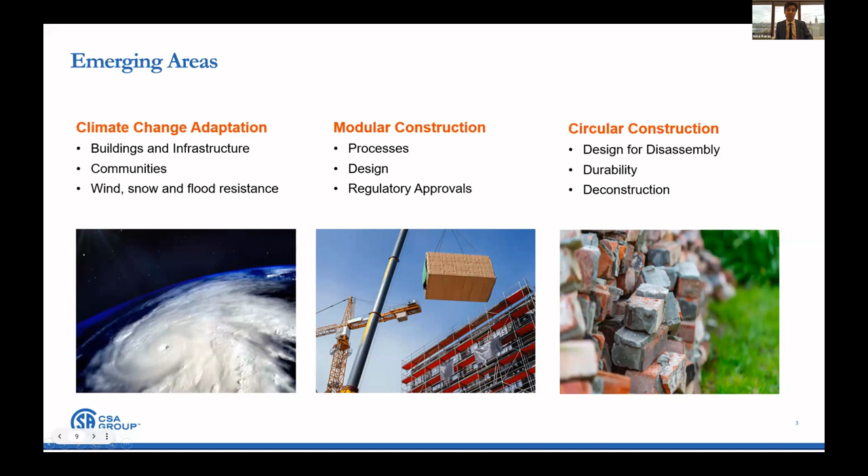On circularity specifically, we have been working on circularity for the built environment for many years, but until recently, concepts such as design for disassembly and our guide on that, adaptability and deconstruction were unheard of. So we waited patiently as we knew these concepts were real, important, and would also serve society well. We just needed a catalyst. That is why we are very thankful to CELC, with whom we've partnered on a number of initiatives, including on funding 2 of the research studies that directly supported the development of CELC's guide for the commercial real estate sector.

We are thankful not only to Helen Goodland of Scius Advisory and Ryan Zizzo of Mantle Developments, who are the leaders on our research team and were in charge of these 2 studies and reports, but also we are thankful to all of you present today for insight and input to shape these studies.

As we will momentarily hear from Helen and Ryan, these reports provide a breadth of guidance and best practices on extending the lives of existing office buildings by looking at things such as design interventions for optimizing existing buildings, ways to minimize waste, reuse of salvaged construction materials, and also the role of embodied carbon and life cycle assessments.

So today we will hear that conditions are ripe for extending the lives of existing office building stock through upgrades, renovations, conversions, and other creative forms of adaptive reuse, and a combination of private sector financing, public policy, standards, and industry could help implement and scale circular strategies. At CSA Group, we are thrilled to continue helping in facilitating the uptake of circular economy strategies for the real estate sector and more widely for the built environment as a whole.

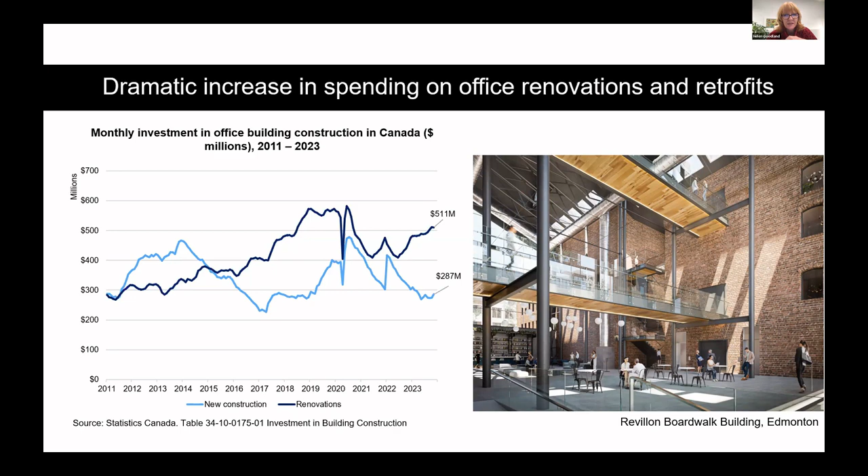Next. There's other business cases for circularity. I think we're going to get into more of these shortly, but everything from reducing operating costs, engaging customers and employees, attracting new tenants, I think is going to be an incredibly important one, and we'll hear from others on that. But there's also opportunities to spur innovation. The building industry is very large and has a great role to play in Canada's innovation and competitive stance across a number of sectors. Next.

The way we've organized our report is around the 4 key areas, really following the life cycle of the building process. So there is a number of circular design strategies that are discussed, and within each we are providing examples from Canada and around the world. So everything from upgrades and renewals, tenant fit outs, versatile design, and so forth. And then we get into circularity in the field. We're looking at how construction processes and tenant improvement processes can adopt circular practices.

We look at the end of life and then back into new life of products and materials, circular input strategies, secondary material markets, and so forth. And then I think the most important piece of all of this is, well, where do we start? So in the top left-hand corner is looking at what are the underutilized circular strategies that we're starting to do today, and what can we really leverage to get moving in this area first.

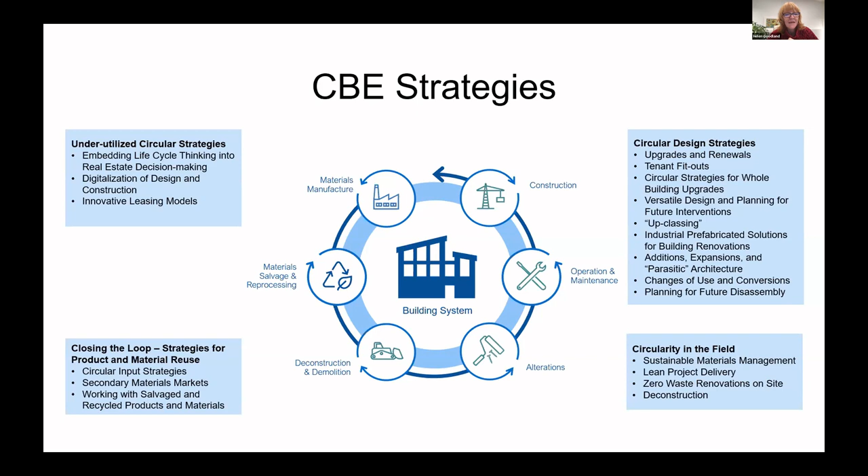So those are life cycle thinking, which of course Ryan is going to be talking about, digitization of the design and construction processes, gathering data, finding out more about what we're really doing, and then finally innovative leasing models. And we're seeing quite a lot of really amazing and creative solutions to making leasing more attractive to the market. Next. So a couple of examples.

Next one is, there's a lot of talk in Alberta right now for Calgary and Edmonton in converting offices into residential buildings.

Next. In the US, we're seeing this in Canada too, there's a great example of adding a mass timber structure on top of an existing concrete building to save on foundation additions. If they had just added concrete or steel, they'd have had to upgrade foundations.

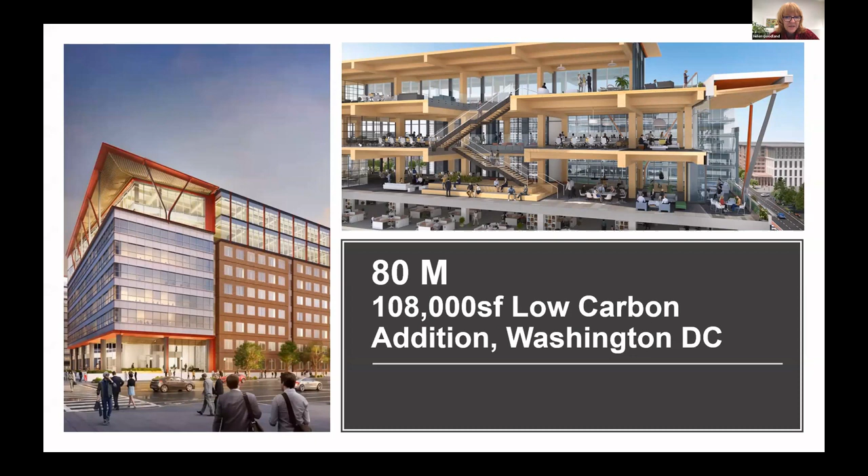Next slide is an example from Australia, which is a very interesting approach to sort of a whole building leasing strategy. Suncorp is a very large company in Brisbane, Australia, and they were able to set up their new building really around their leasing approaches. So they were able to plan for future expansion, contraction, attracting other tenants, even co-working opportunities.

So that's their building. And then, of course, within that, they were exploring on-demand space where they allow tenants to rent individual components, meeting rooms, equipment, and precincts, so that, you know, in the event that you want to expand beyond your building, you've actually got more than one building that works together in your leasing strategy. So super interesting case study. Next.

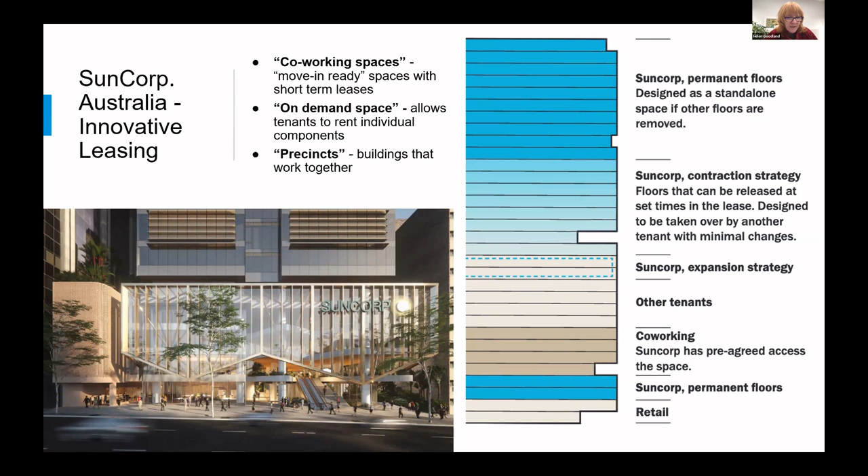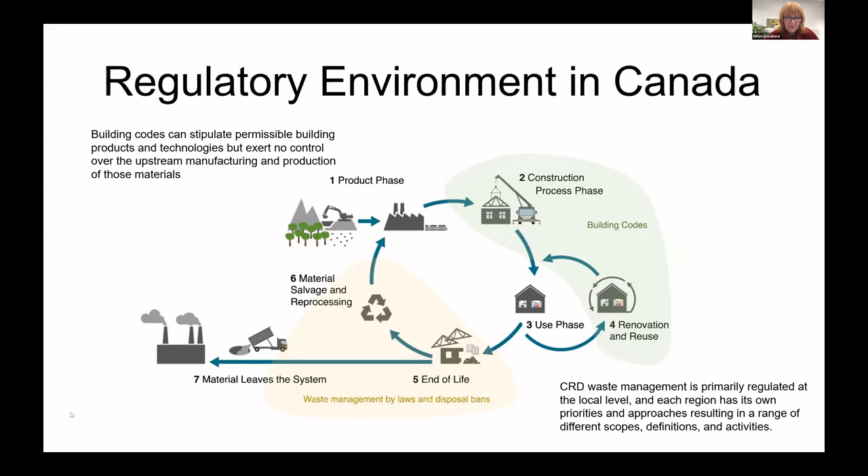But supporting that, there are a number of emerging policies, voluntary programs, and market mechanisms, which are sort of precursors to the regulatory world. So you see a number of standards sort of tested out and integrated into the building industry's lexicon through things like LEED and procurement programs, and they sort of are good indicators of what's to come. And there's a lot of work being done in this area.

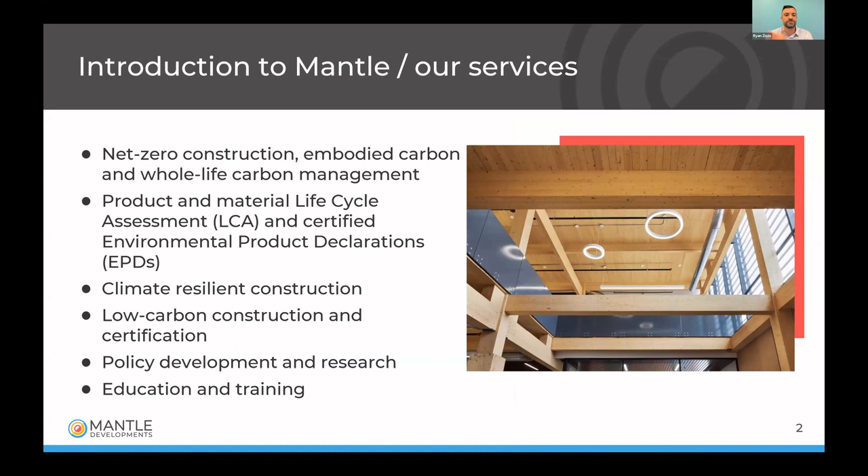We help a lot of developers actually to manage this, quantify and reduce the embodied carbon on their projects, and also help policymakers and researchers do work like this to really understand the impact of these policies and help get them more broadly exposed in the market.

I'm going to just take a couple slides here to give a little bit more of an overview of what we specifically mean when we say embodied carbon, because I know it's not a super common term to some folks in the industry. It's kind of relatively new, but embodied carbon is what we mean when we say all of the carbon footprint associated with basically the materials associated with our construction projects.

So how materials are made, all of the industrial processes associated with that, how they're transported from manufacturer to the construction site, the construction process itself, any replacement of materials on a building site. So if we're changing the roof in 60 years or changing the windows, there's a carbon impact with those materials that we're bringing to the building. And even the end of life, how we demolish and repurpose and recycle the materials.

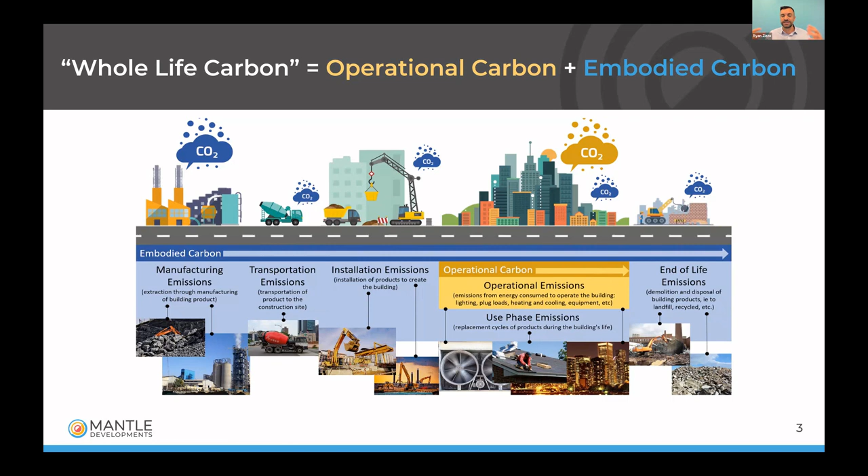So basically on this slide, everything in the blue shaded areas, the emissions associated with those activities, is what we mean when we say embodied carbon. And you can see that's quite a lot of activities, right? There's a lot more to the carbon footprint of our buildings than just the energy that we use on an annual basis, which is the traditional way that we've been managing carbon in our built environment.

And on this slide, I like to show why this embodied carbon is becoming such a pressing issue and is really gaining a lot of attention recently, and it's going to become even more important in the future. And the simple reason is because our operational energy and operational carbon footprint of our buildings are reducing over time. Every new building that gets built is more energy efficient and uses less carbon than buildings of the past.

As we all know, we have new building codes that are continuously being updated, and we're decarbonizing our energy system. So when you put those two aspects together, buildings of today and of the future are using significantly less carbon in their operations, ideally getting to net zero in their operations. But we haven't been doing a good job traditionally of reducing the embodied carbon associated with making, transporting, and using those materials.

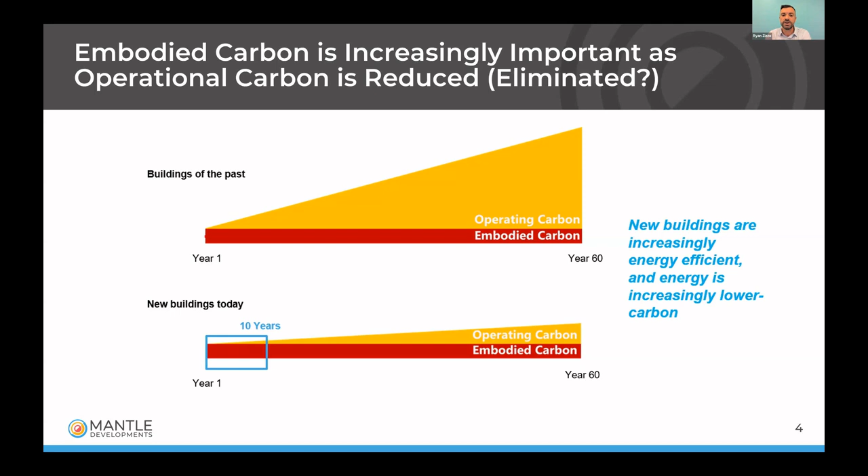So this is why it's become increasingly important. And as we decarbonize operations, it will just become more important to really tackle our embodied carbon emissions. This slide just shows the same thing with different visuals, showing that currently embodied carbon, the red, is a minor part of our total building carbon footprint. But over time, as we're getting that gray operations down to zero, we're going to be left with only the embodied. So we really need to start thinking about how to manage that.

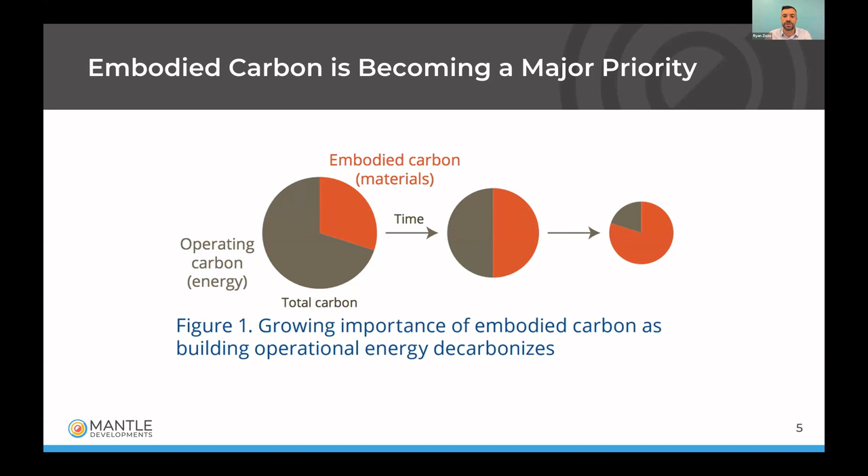And when we're talking about reuse and rehabilitation, one strategy to minimize that embodied carbon is to get more of our materials from reuse and rehabilitation, from salvage. We want to talk about things like deconstructing our buildings and having salvage yards of high quality usable materials that we can use in future renovations.

And CSA Group has a number of standards to support this, including a standard on designing for disassembly so that buildings are put together in a way that they can easily be disassembled. And they have another standard on designing for deconstruction, on how to do that in an appropriate way.

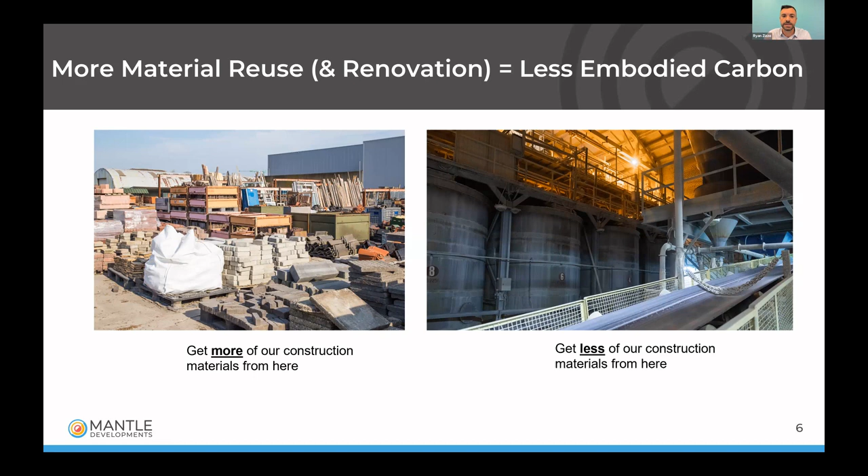So obviously those salvage materials have a significantly lower carbon footprint to salvage them and reuse them than to make virgin materials in many cases. So in this report, we wanted to dive into some of these strategies and put some numbers to the ideas, right? And to understand what the carbon savings actually is with some of this reuse.

And again, as Helen said, these were very significant reports that we really can't do justice in the 10 minutes we have. So if people want to dig into this, I really would recommend you to check out the report in detail. But what we did in a nutshell was looked at various different building types or office types, a high-rise and a mid-rise office. And we looked at it in 3 different regions across the country, in Toronto, Vancouver, or Edmonton.

And then we said, what would the carbon footprint be of deconstructing an existing building and a new construction? So our base case was that there was a building on a site. So case 1 was deconstruction and new construction. Case 2 was retrofitting that structure, a deep carbon retrofit where we're replacing the envelope, we're replacing the mechanical and electrical systems. Basically, everything other than the structure is being replaced. And that's really what's needed when we're talking about a deep net zero operational retrofit.

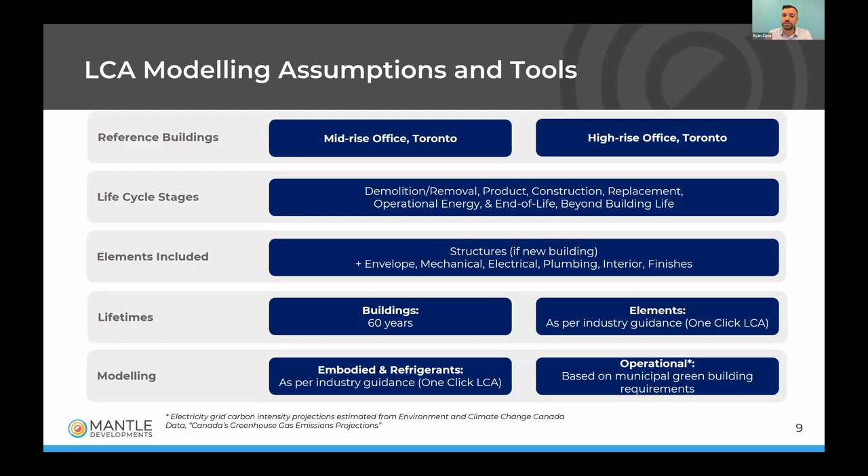So this slide goes into a little bit more details about what decisions we made for some of these elements. And we did also look at the refrigerants, the refrigerant emissions. And the operational carbon footprint was basically based on the highest tiers of the local municipal standards. So we were saying, the best in class greenest building that we're seeing in these markets is how we modeled these. And we reuse the structure in the case of the reuse. That was the main carbon difference between the 2 scenarios in each of the regions.

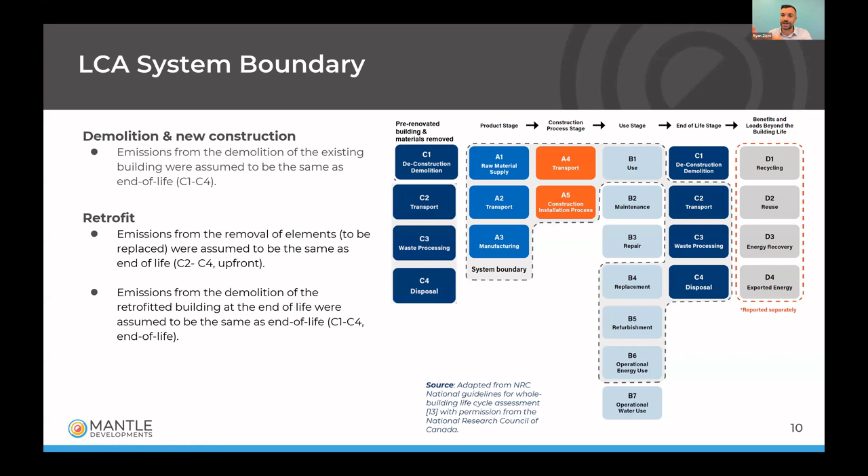So this was how we did the analysis on this project, which was a little bit unique, and we're hoping that we're going to see more projects include that demolition of existing buildings when they're looking at their carbon footprint, because most projects are ignoring that, and we think that's probably not the most appropriate approach.

So just to quickly show the results here of some of the key takeaways, this is the Toronto mid-rise scenario, and you can see that the new construction on the left has a much larger section associated with the embodied emissions, that gray box, and the embodied emission increases over time at some key times in the future, because that's when we see things like windows being replaced or a roof replacement, or a major kind of renovation on the project. But the vast majority of the embodied emissions happens up front at the construction process.

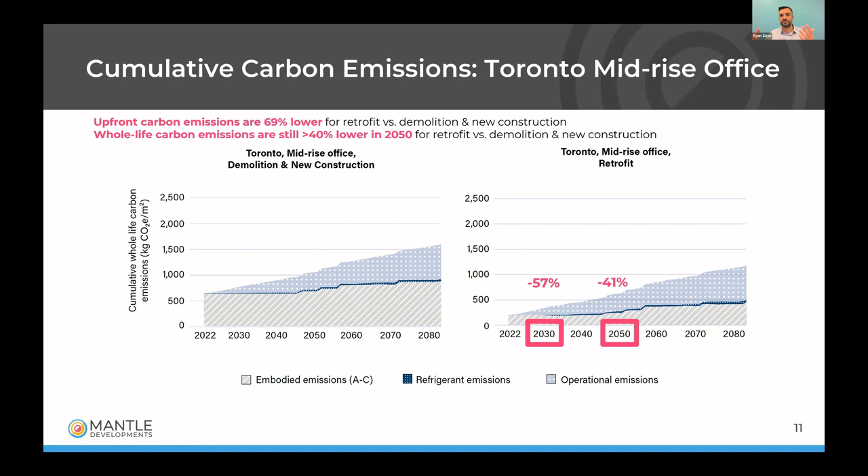And you can see in the retrofit scenario on the right-hand side, that gray embodied emissions box is significantly lower. Probably it looks like it's about a third lower in this scenario. And you can see that at 2030, the total life cycle carbon savings of the retrofit scenario is about 57% lower than the demolition and new building scenario. And at 2050, it's about 41%. So that percentage savings due to renovation reduces over time, just because the operational emissions are taking up more of the total carbon footprint of the building. So that's why those numbers are just reducing over time.

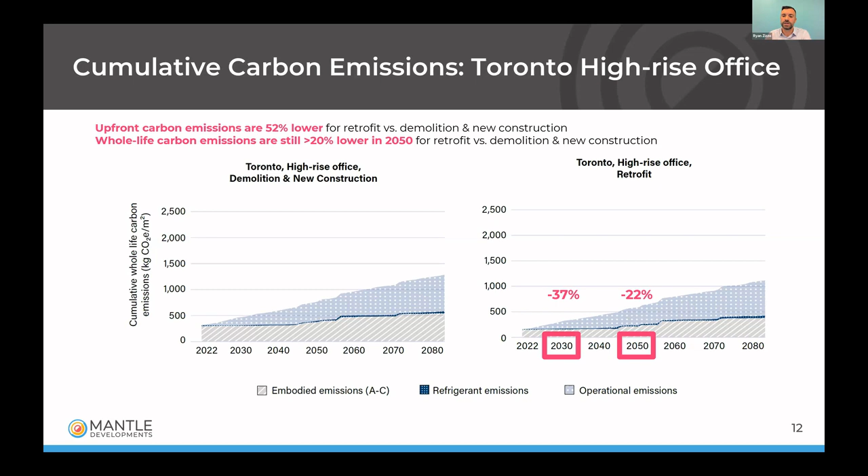And it's different in the different markets, because this is the high-rise example. Now we're seeing a similar trend, but just the numbers themselves are a little bit different. But the trends are staying the same, right? The retrofit has a significantly reduced upfront carbon emission, and we're seeing significant savings due to the retrofit scenario, even out to 2050, right? It's over a 20% savings, even when we look out to 2050. So those were just two of the snapshots.

As I said, there's many more in the report, but the general high level takeaway here is that in all cases, the retrofit scenario is the lower carbon scenario. There was no scenario that we ran where a demolition and a new build was a better carbon decision. And the scale of that, as I said, just depends on the size of the building and the location and the operational mix, right?

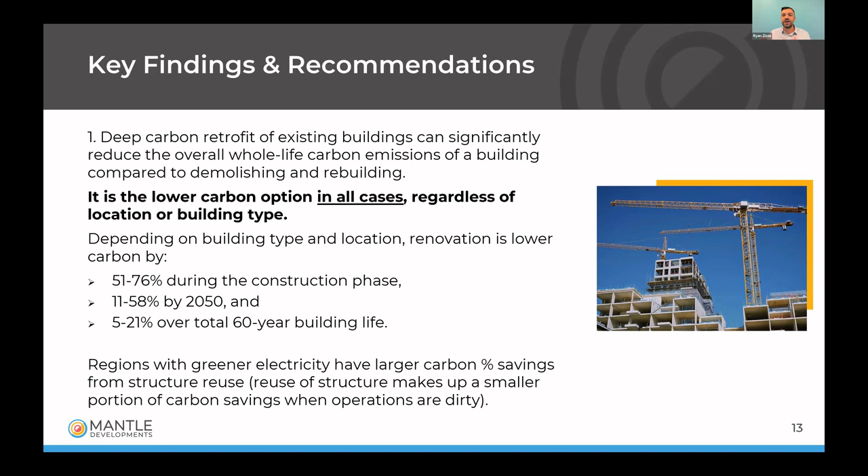How much carbon is in the operational footprint of the electricity grid, how much energy is used to operate that building. Those are the factors that change how much carbon is saved for the retrofit. But in all cases, it was definitely the low carbon option. And that was really a key takeaway here.

Some other recommendations: sometimes new construction is required. We're not saying that it's realistic that we're never going to do a demolition and a new construction. We want to just save those for special cases where it's really the only option, or where there's many other social benefits for that. But we don't want it to be the default, which it currently kind of seems to be.

So when there are situations where it does make sense to do the demolition and new construction, we really want to make sure we're doing everything we can to use low carbon materials. Salvaged materials, as I said, is a great place to start, but if not, at least a low carbon concrete, low carbon steel, or a bio-based material. So something that actually takes carbon out of the atmosphere as it grows. So think wood, for example.

There's also new innovative materials being developed that are made out of agricultural byproducts, things like corn husks or coconut shells. These might not be at scale yet, but these are the solutions of the future that we need to be starting to support, because all of those solutions are really helping us take carbon out of the atmosphere and locking it into our built environment.

And another interesting finding here, we found that if you account for that biogenic carbon that is stored within a material, then the new construction with biogenic carbon actually has a very similar carbon footprint to a retrofit scenario. So there are ways and solutions to minimize that footprint of the new construction.

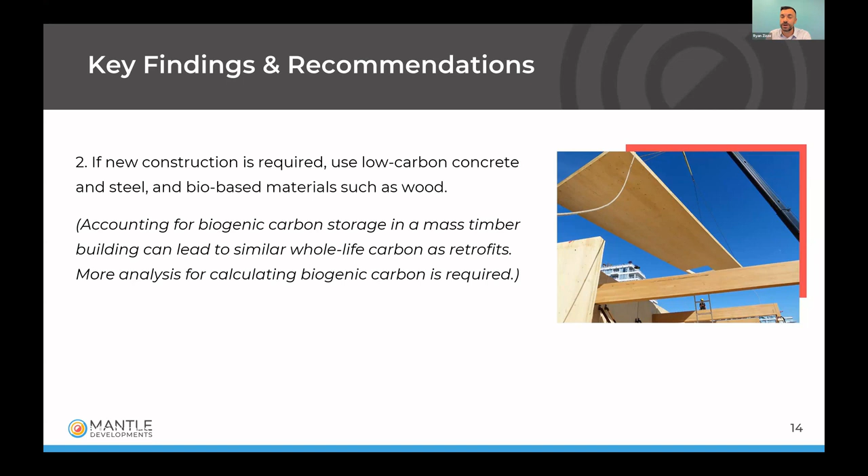A lot of the outcome here was lessons learned in terms of data gaps and what we need to have more information about to have this be a more broadly acceptable quantification approach by industry. We really need more data associated with demolition. That's a big blind spot of the industry. As I said, we're kind of using life cycle assessment associated with demolition of current construction, but there's not much data about the fuel and the consumption required to demolish existing buildings.

We need better life cycle data around interiors, mechanical systems, electrical systems, and plumbing. All of these elements are traditionally overlooked, even in the whole building life cycle assessment space. Typically, whole building life cycle assessments are mostly looking at the structure, the core of a building, and the shell of the building, so the envelope of the building. But those are not the only carbon footprint in construction.

So we really need, as an industry, to start to understand the total carbon footprint of all of these systems and look for ways to minimize them across the board. So that was a lightning take through the report, but hopefully that spurred some interesting thoughts from some folks here.

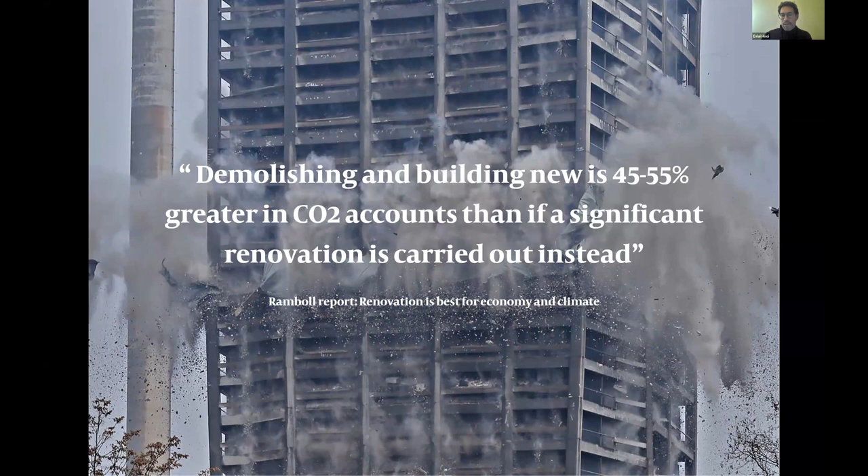Usually it can be cheaper because most of the product is right there before you demolish in the first place. But the simple point is that the margin of error, how you calculate the transformation, how you calculate labor, and how you calculate the costs of taking things out and putting things back in, are grossly understudied in transformation versus new build. And so this margin of error can cause the destruction of buildings. Also, of course, a lack of imagination on behalf of the client, or the lack of ability to calculate risk on behalf of the underwriters, the insurers or the financiers.

But the interesting thing from my perspective is that the cost of transformation is primarily in labor, and with new build, it's primarily in material, where you're essentially shifting the labor to other countries where it's cheaper in order to squeeze down the margin that's left over after the material cost. And of course, we talk about carbon, but we don't really talk about the massive material waste, which itself is an environmental disaster. When we talk about transformation, most of the labor is localized.

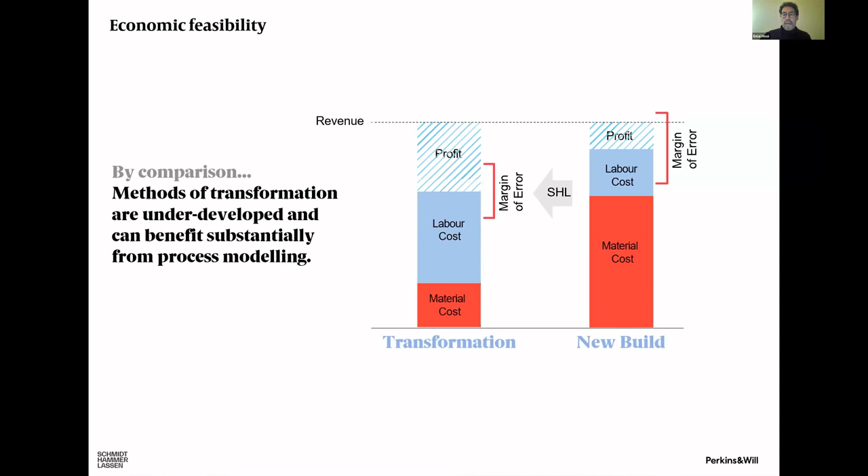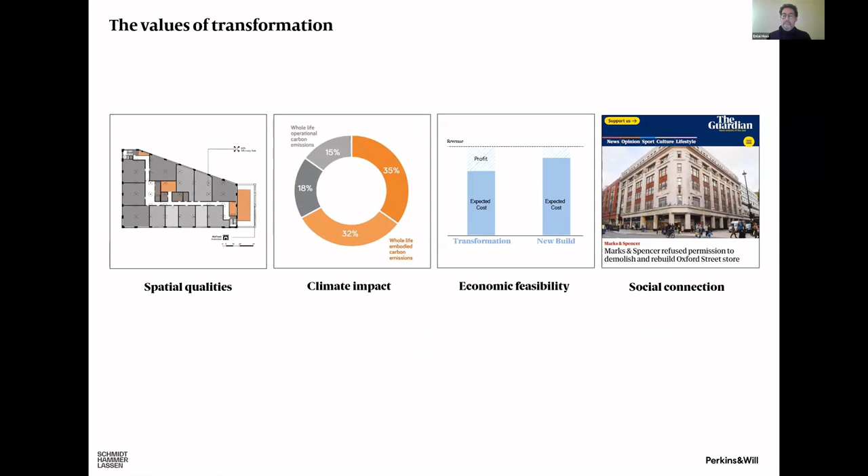And if we can do something to accurately calculate the labor, then that could be an enormous win for local economies as well. So the idea is to really take the margin of error and analyze the process of transformation to the point where it becomes carte blanche a better business case than demolition. And that's what I think we should all be aiming for. So there are different levers, if you like. If you ignore political levers, there are other levers that matter in the social milieu and also in development. These are some of them.

And two projects that we're working on right now. One is really creating a construction simulation to calculate the cost of transformation if you were to use offsite manufacturing and timber, for example. And the other one is to look at the idea of the stranded assets and use AI to help us do geometric calculations to say, if a building didn't have an identity, if it wasn't an office building and it just existed as a structure, what could it possibly be?

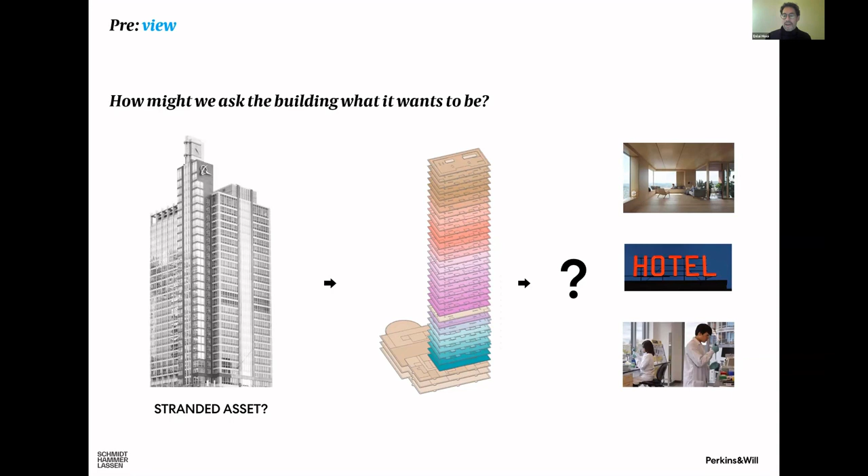And we're using different types of digital processes to be able to calculate that, and using natural language processing with AI to be able to infer codes for different typologies into existing structures. So that's me. I'll stop sharing.

Thank you. I don't want to go over time. I think that's a really interesting point, to really dig into that margin of error so that you can better understand what are the risks, what are the real costs, what are the labor considerations, what are the supply chain considerations. And maybe I'll just ask, are you seeing a growing interest in some markets where you're working? Like, how much is this happening in Canada, these conversations today, versus Europe or other places?

Absolutely. There was a sea change that happened between last year and this year. And part of it is due to the fact that there's so much stress in the market at the moment, both on the municipal side with regards to decreasing rents and emptying cities, and on the developers' or the asset owners' side with regards to stranded assets, because if they can't change the typology or use of their building easily enough, they essentially have something that's costing them money.

And then finally, with regards to carbon, with regards to environment, the political sphere is starting to wake up to the embodied carbon involved in demolition, the waste and the destruction, if you like, of the social milieu that happens. We talk about embodied carbon, but what about embodied culture as well? These are things that really have been in the habit of creating gentrification in cities in a very unhealthy way and not letting communities stay in place and survive.